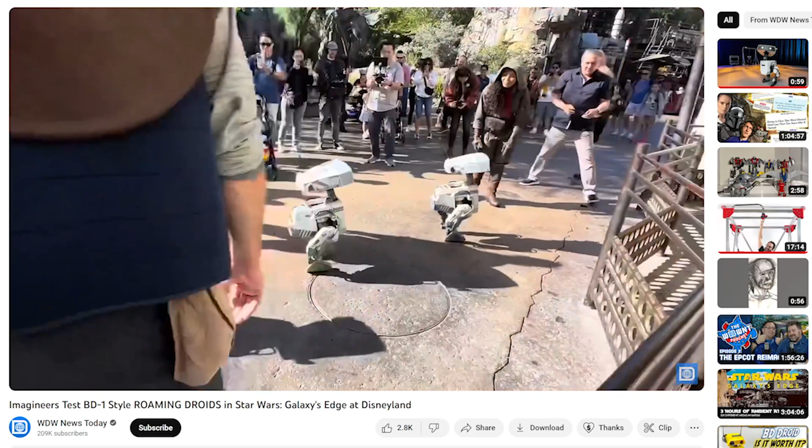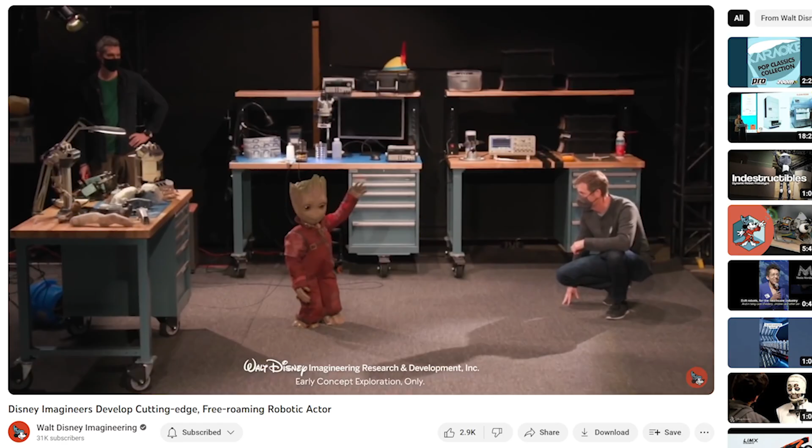A number of people have sent me various videos of the new Star Wars droids walking around Disney's Galaxy's Edge theme park. These are smallish bipedal droid characters, a bit like BD-1, but bigger with bigger joints because they aren't fiction. These are actually pretty dynamic robots which have come out of Disney Imagineering. The same team most likely built the Baby Groot robot we saw a couple of years ago.

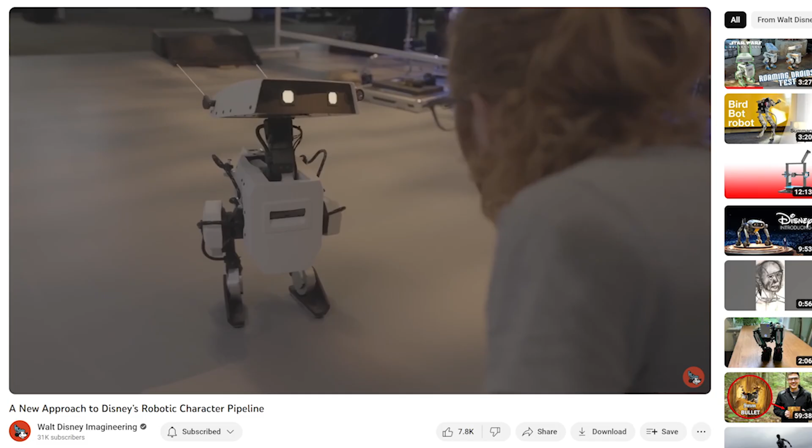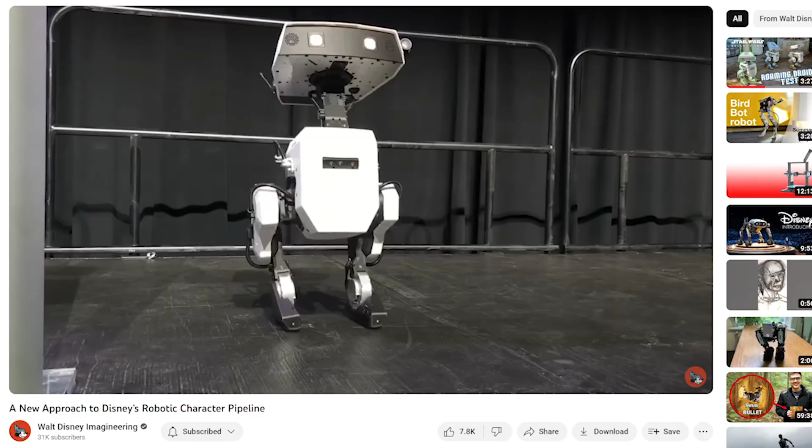Key features include the ability to walk on uneven terrain and stay upright if they get pushed around. They're also quite emotive characters and appear to potentially have some form of AI to make them interact, although they're also puppeteered. Interestingly, it looks like they don't have sideways ankle joints, they just pivot on the feet, which are long edges that touch the ground. Otherwise, as far as I can tell, they have an axis at the ankle, knee and hip, and then two more axes for sidestepping and rotating the legs so they can walk in a curve.

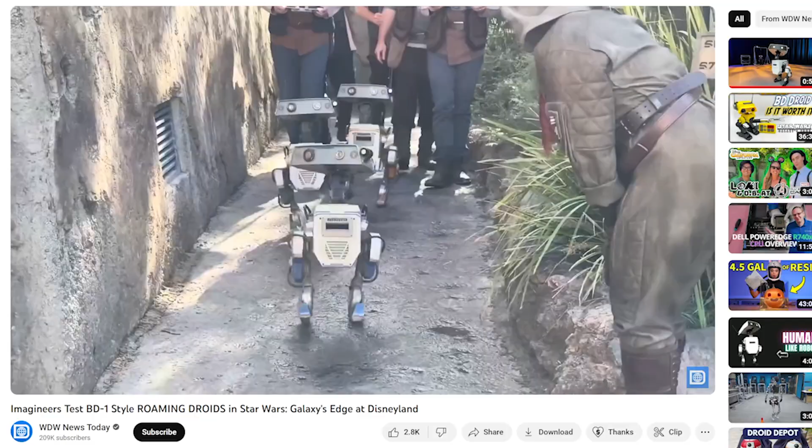They also have a head which does a few things, and in some footage it looks like that may be helping stability front to back. But it's not always apparent, and probably isn't necessary since other bipedal robots don't need to throw mass back and forth like that.

So a lot of people have asked if I can make a project like that, but I'm not a team of researchers funded by Disney. I'm just one person in my house making YouTube videos for clicks.

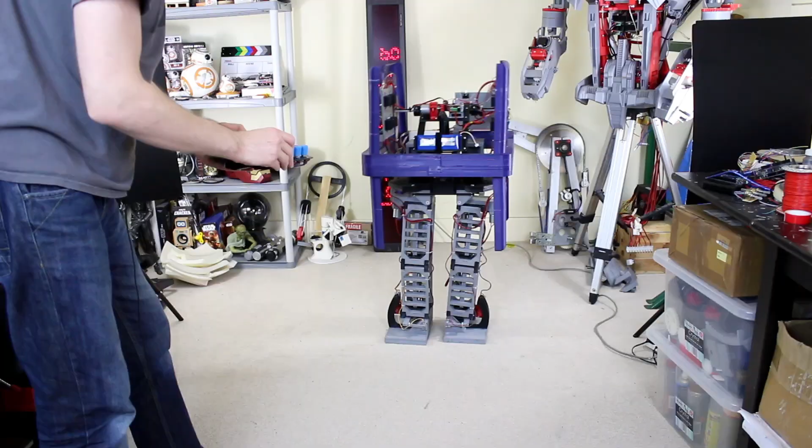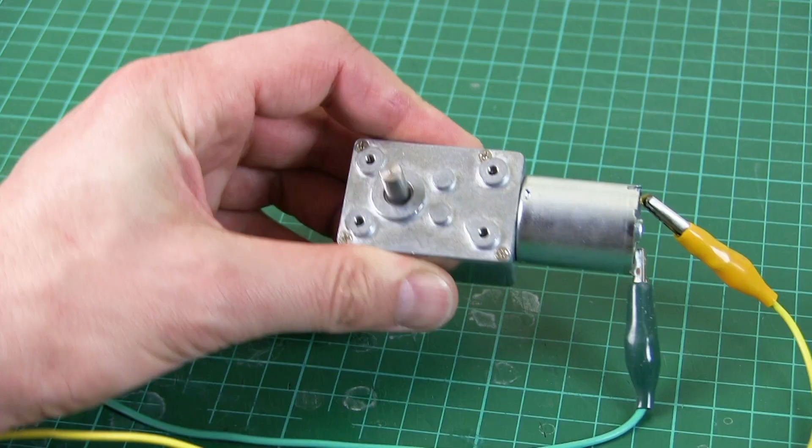Some of you may remember my walking Star Wars Gonk droid that I built some time ago. I was pretty happy with the results at the time. This robot had pretty big feet, which it definitely needed, and I was on a pretty tight budget at the time, so I used motors that only cost around £10 each, and of course a lot of 3D printing. It was dynamically stable though, so it measured its angle with an inertial measurement unit and tried to balance.

However, unlike the robot dogs I went on to build, the Gonk droid had no inverse kinematics or interpolation, which we'll talk about later in this video. So I was just adding some numbers to some of the angles based on how far it leant over and trying to coax it along.

I've learnt a lot since then, and I also have more budget, so I'm going to attempt a new bipedal robot based on the Disney droids.

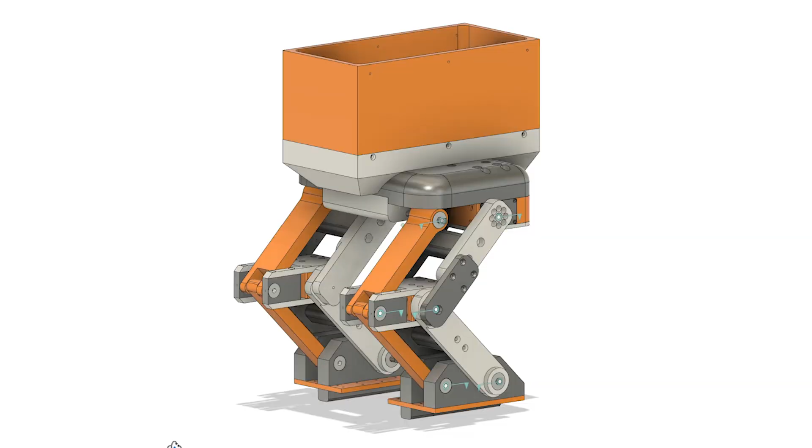The robot I'm going to build in this video will only have 4 motors. I'm going to ignore 4 of the hip joints as well, and also simplify the legs so we just end up with something that's a bit like tipping a box onto its corners without the body being able to translate directly sideways. I am however going to walk on feet with edges to pivot sideways, so no big feet this time around. If this works okay, then I can move on to build something more advanced in a future video with a head and some of the missing joints.

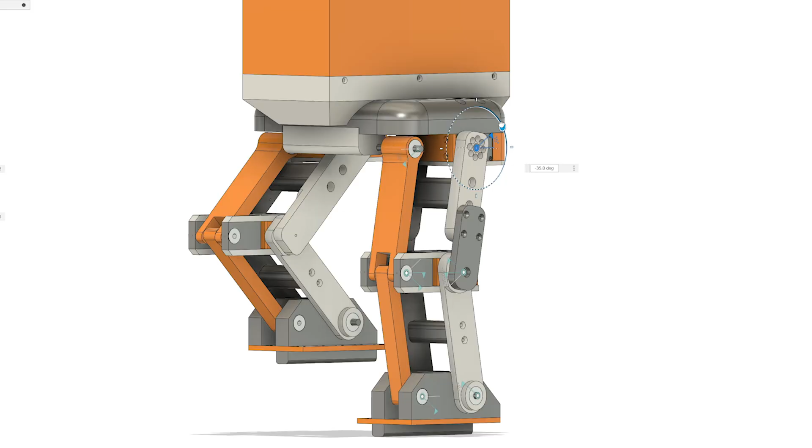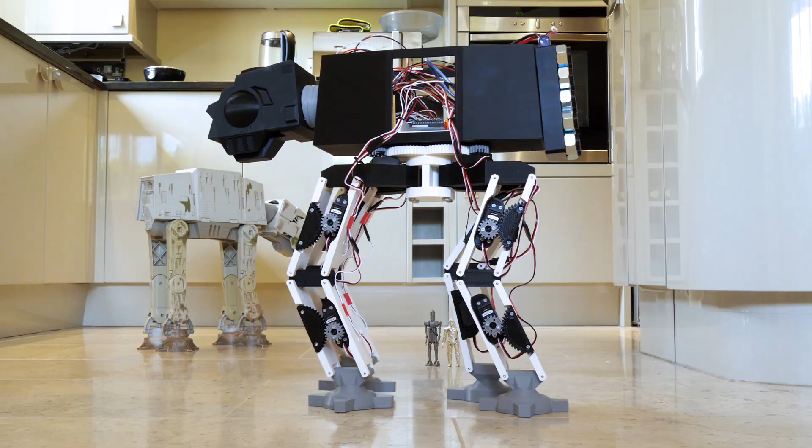So my legs are parallelograms, which means I only need one motor for each half instead of separate ankle, knee and hip motors, and that's all the axes it has. This leg structure is similar to how I recently built the walking AT-AT project, which you can check out on my channel, although that didn't have to balance sideways, and also the original Gonk droid, but that had really big feet. So we'll see how it goes for me this time.

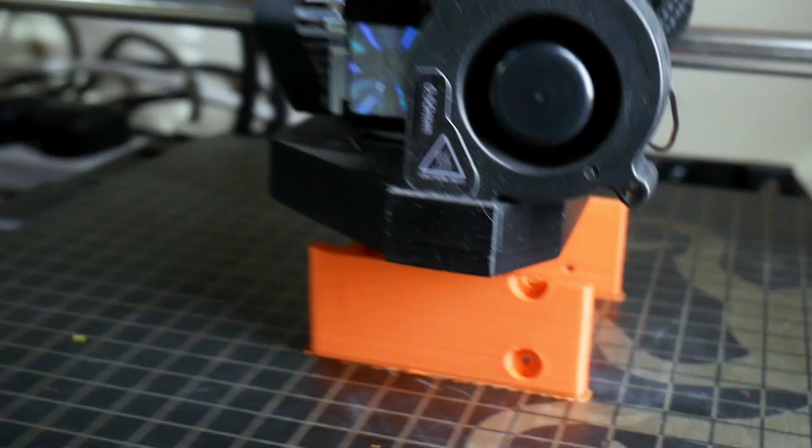There's quite a few parts to make for this project because it's bipedal, which means we have 2 legs and we have to make all the parts twice plus the bit of the body, but it's not as bad as making robot dogs I guess with 4 legs.

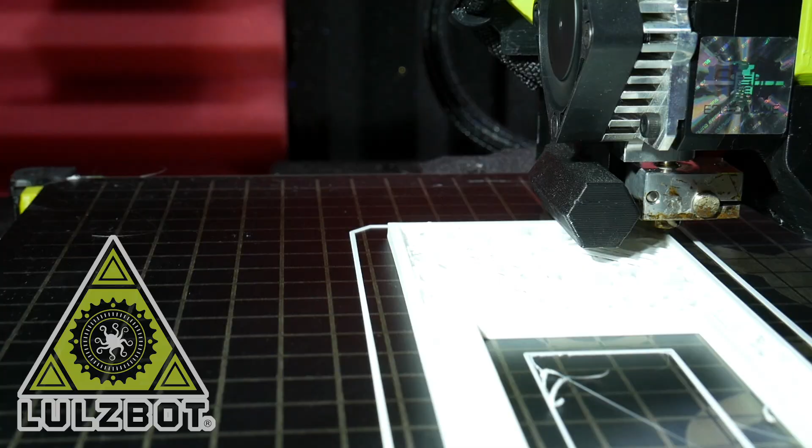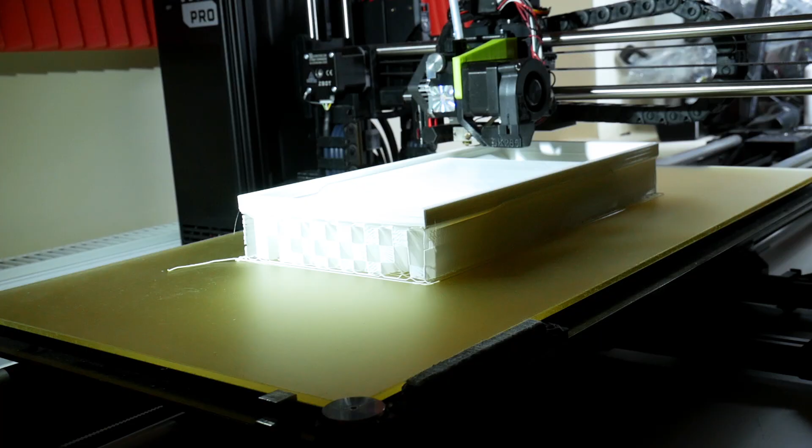Here are some of the sticks that make up the parallelograms for the leg, and we've also got these feet parts to print, of which we've got 4 because there's 2 on each side. The body doesn't actually fit on the normal LulzBot Taz bed, so I'm using the Taz Long bed, which has a bed twice as long as the other printers, and that'll enable me to do the hips and the main piece of the body, which we're colour coding to look just like the Disney droids.

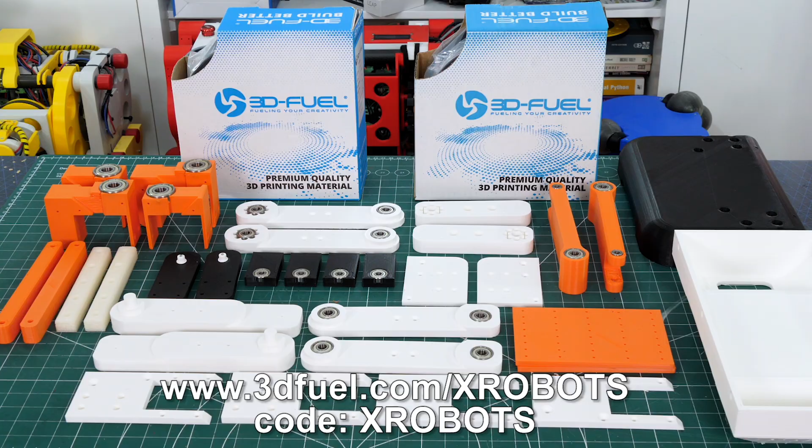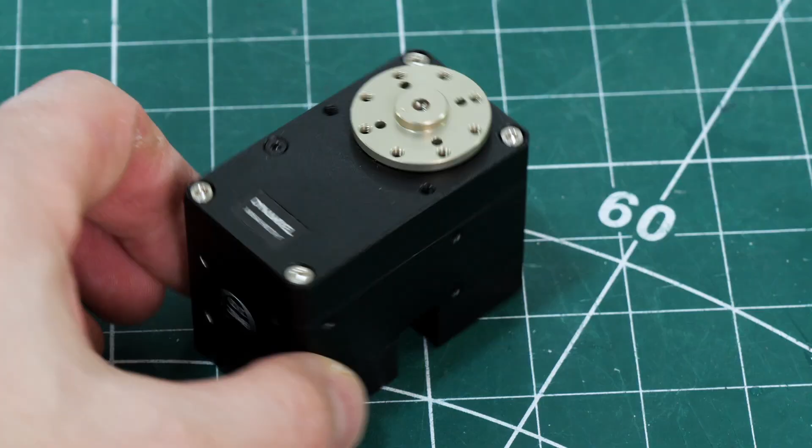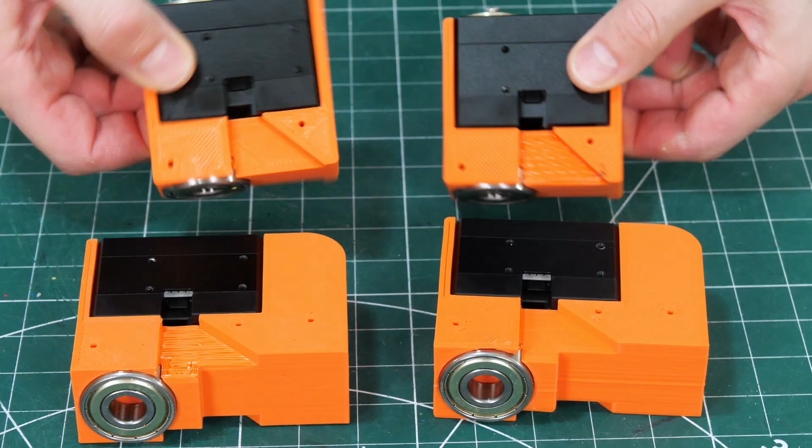I'm going to be using these Dynamixel servos for this project, and these were previously sent to me by Robotis, who are the manufacturer, and I've used these in some projects before. These are XM540 W270T servos. Each one of those is mounted in a housing with a bearing on the bottom, so we can make a double hinged or double braced joint, and that should be pretty sturdy for our robot.

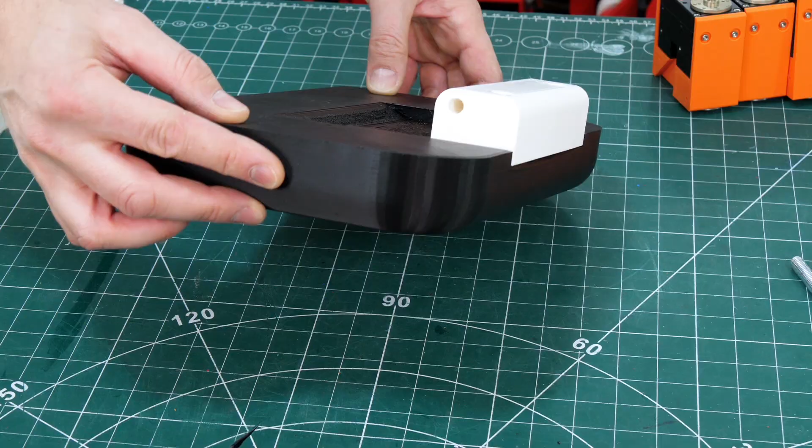This is the hip section for the robot, and on the bottom of that piece I've got another 3D print which is glued and screwed on, and that's going to be the back pivot point for the parallelogram, so I'm just going to put some 8mm studding through there. That's fixed on with some nuts either side, and that's going to make the back pivot point for the legs.

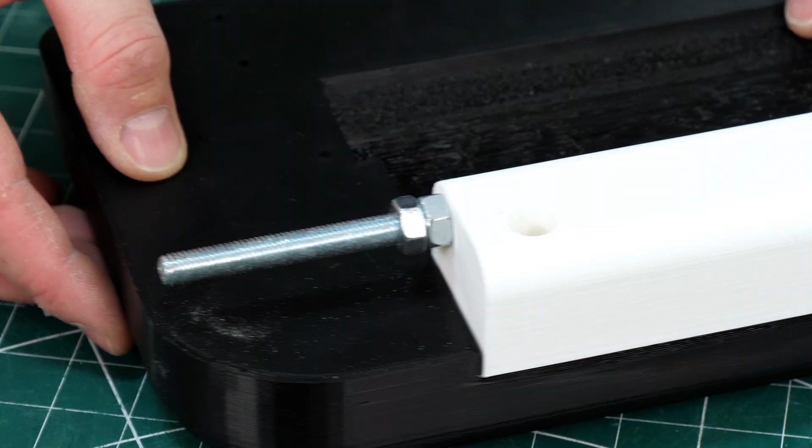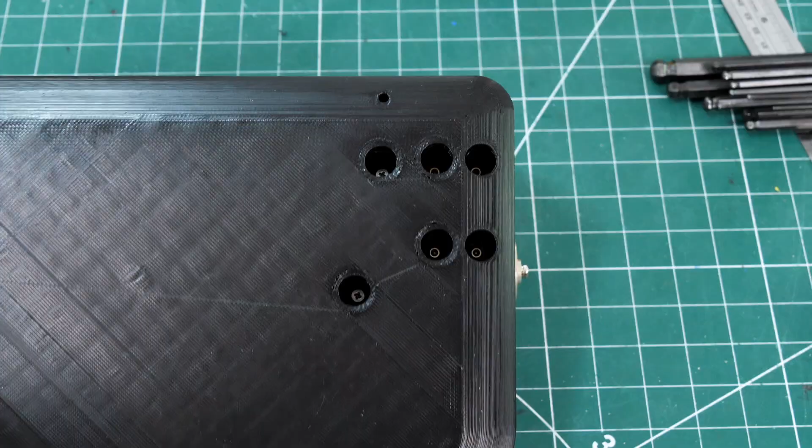So each of these servos actually has some M2 holes, and I've also left some holes in the 3D print, and those can be screwed or bolted through into that hip section. And that's going to be the mounting for most of these servos. I did design a plate for the bottom of these as well, but I'm pretty sure that servo's held on okay now, and it also restricts access to the connector where I need to plug in the data cable, so I'm not going to bother installing those right now.

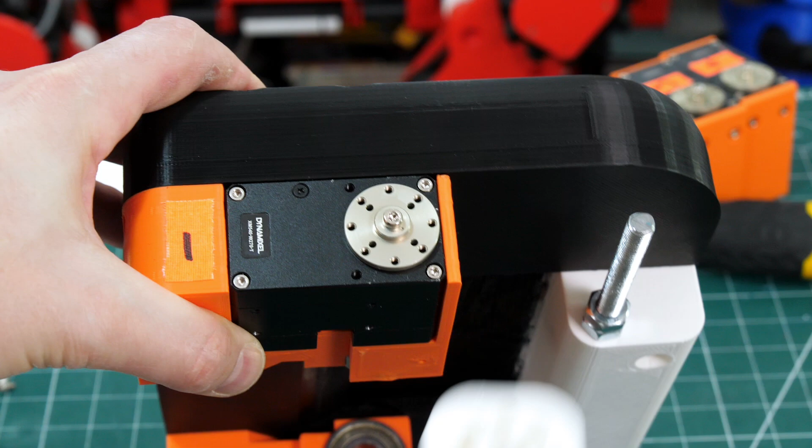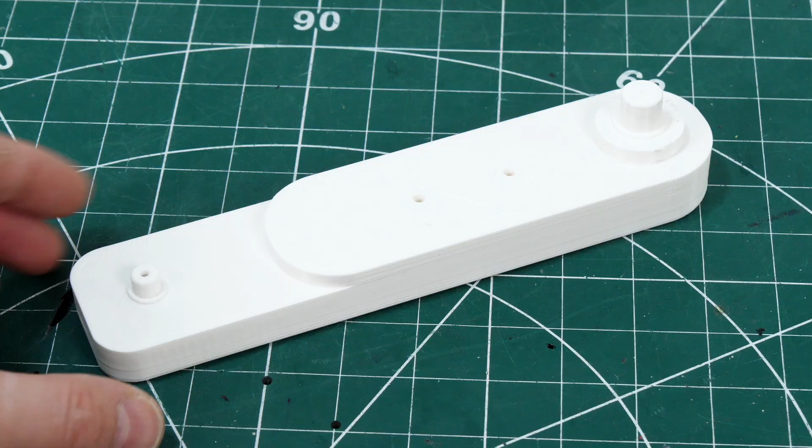The output of the servos has a nice plate with lots of M2 holes, and of course I can attach my 3D print right to it, and that's going to make the first part of the leg on those servos on each side. And that's basically the thighs. On the other side of the servo, the inside of the thighs, we've got another piece, and that piece has got some lumps installed that fit into the bearings. I've put a screw through those, that means they've got a metal core and they won't easily snap off, so that should be super tough.

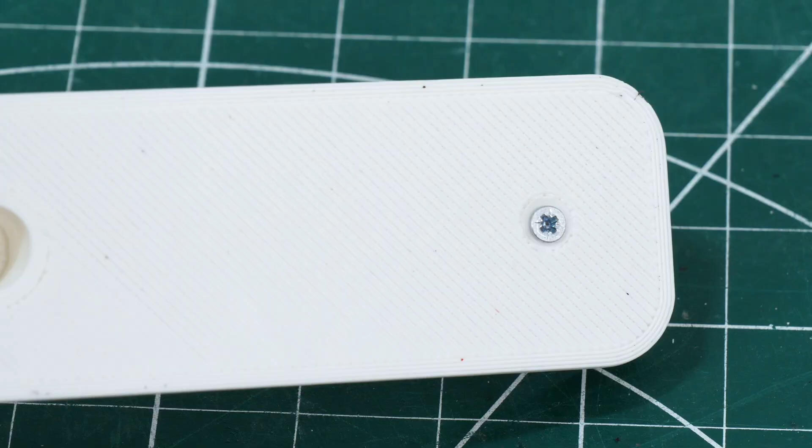That plugs into the bearing, which is on the back of that servo mount, and then that moves quite freely. And there's a spacer between those that holds them together so that the pieces don't just pull out of the bearings. So those are my two fronts of my thighs now complete.

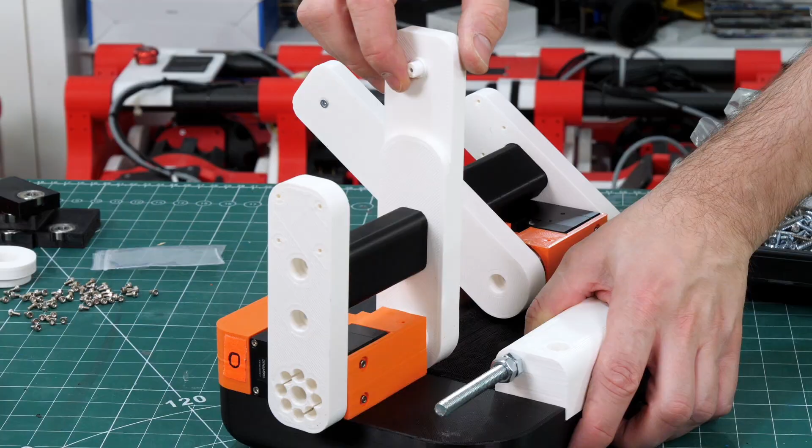The legs are made of parallelograms, so we've got the back of the parallelogram as well, which are made of these parts, which have some bearings installed. So those fit onto the studding on one side, and those are obviously running on bearings, and then on the back they'll fit onto the knee, and that will make the parallelogram for the top half of the leg.

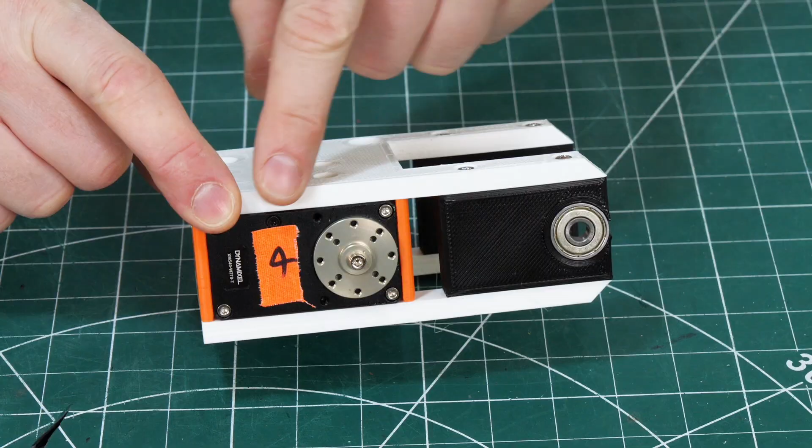The knee sections are two more servos that are going to control the bottom of the leg, so we've got that bearing and the servo horn on the front, and two bearings on the back so we can complete the parallelogram. So the levers are attached to those that go down to the feet, and then on the back of those we've got another piece with a little lump in that fits into those bearings, and that means we've got that double brace section again to go down to the feet.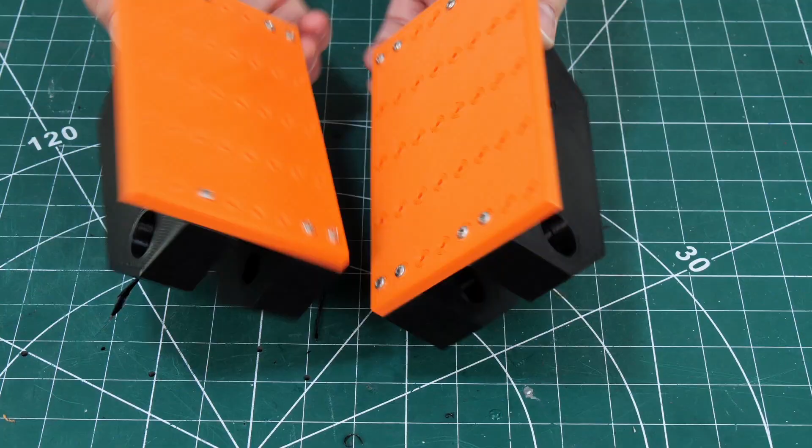The feet have these TPU strips on, which are basically the edges I'm going to walk on, and I'm able to reposition those to different screw holes so we can change the pivot point. And again we've got these orange levers that go down to the back of the ankle to complete the parallelogram, and that's on a bolt through a bearing. With that all together, we've got the bottoms of the legs with the feet attached, and of course each of those are parallelograms with the servo at the knee, which means everything moves parallel together.

You'll notice that orange lever's precariously attached in the middle there with a gap either side, and that means that the orange lever from the top of the leg can come and overlap with it, so they're all pivots on the same pivot points. And you'll also notice there's a bearing on the outside here, and there's also space for a bearing on the inside, and that's again so the top levers can overlap on the same pivot points.

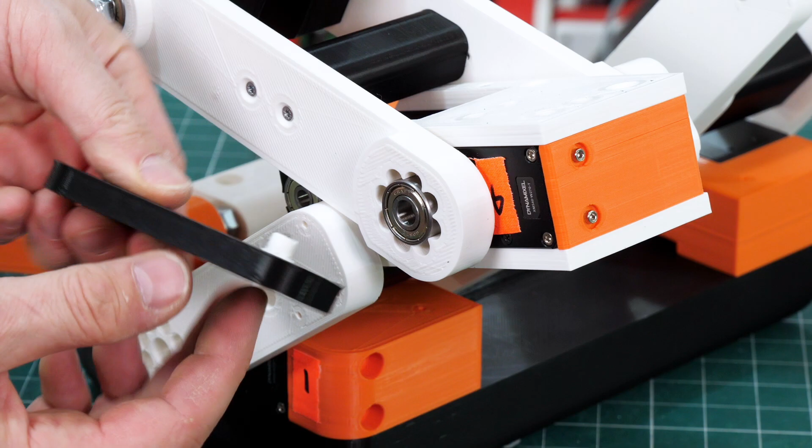And I left those lumps in there on the top of the leg, so we can now put the bottoms of the leg on. And everything's upside down here with the hips onto the bench. The missing piece is on the outside of the thigh, which is another piece with a lump on, and that fits into that bearing on the knee, and then that screws on and holds everything together. So now we've got basically our complete parallelogram as soon as we put that orange lever on, and that, as I said, just fits either side of the bottom half of the lever, and that bolt goes through.

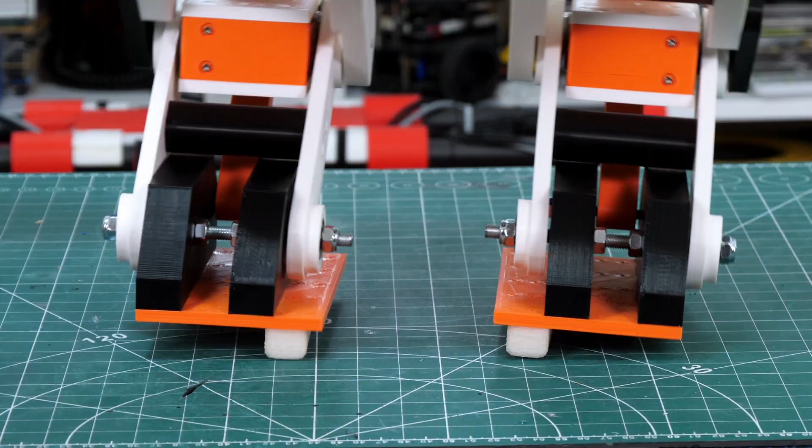So now we've got two parallelograms with all of the pivot points overlapping, and that's going to make it much easier to solve inverse kinematics. These are my lumps that I put on the bottom made of TPU for the pivot points, and I'm probably going to move those around. I've put them quite close together at the moment.

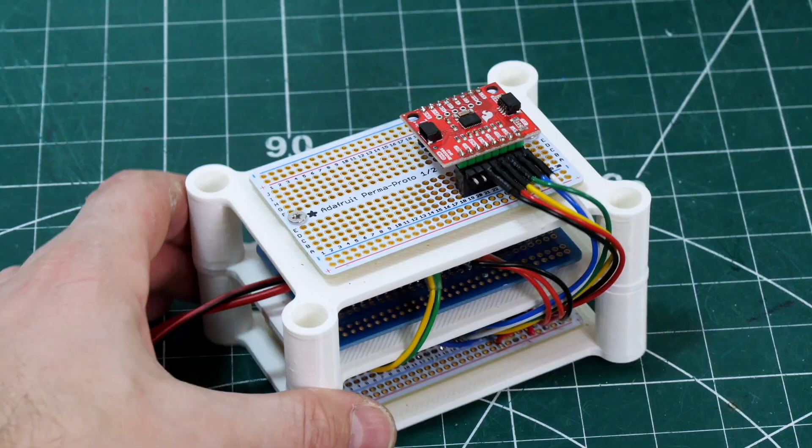This is the body we printed on the TAS long bed, which fits on there, and that's got a split in it so I can take the top off and we can look at the electronics. And that consists of various boards in a stack, which you can see just there. On the bottom of the stack is a Teensy 4.1, which is the main microcontroller, followed by the Dynamixel interface shield, which I've connected to a serial port on the Teensy.

And also on the top we've got the BNO 086, which is a new SparkFun inertial measurement unit that should just give us the angle. I'm using the library and the example provided by SparkFun on the I2C interface to the Teensy, and we can see we've got our three axes of angle there for pitch, roll and yaw. But for these experiments we're only going to use the roll axis. I've got a 3S LiPo battery which is going to power everything sat under the electronics.

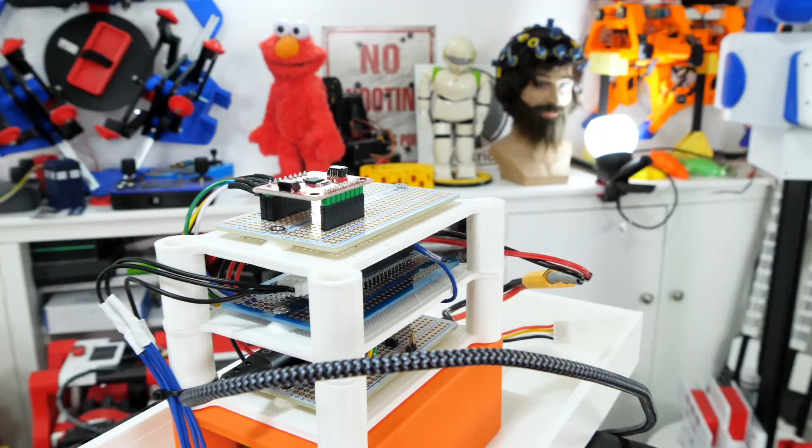So now I've wired in the Dynamixel interface, and I've just split it off and daisy chained the servos in the hips followed by the knees. And that's all you need to do to control them.

Right, let's get this powered up. Well, it's standing under its own power. I've moved these TPU foot blocks slightly further apart so it's a bit more stable now. So kind of like, you know, feels like it wants to walk along really, so let's code it up and see if we can do something.

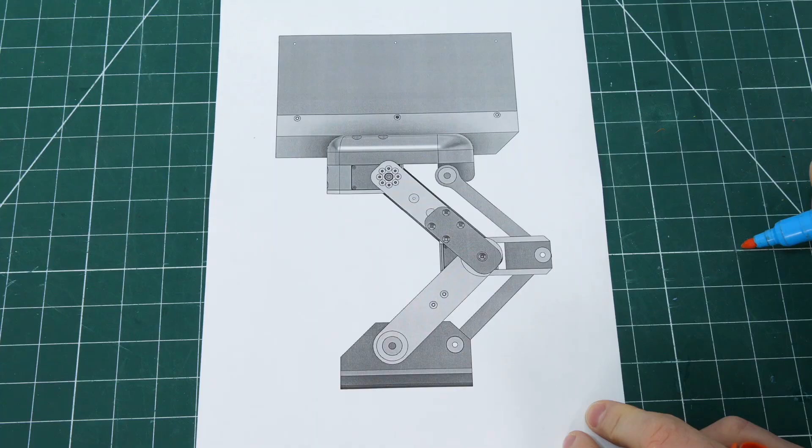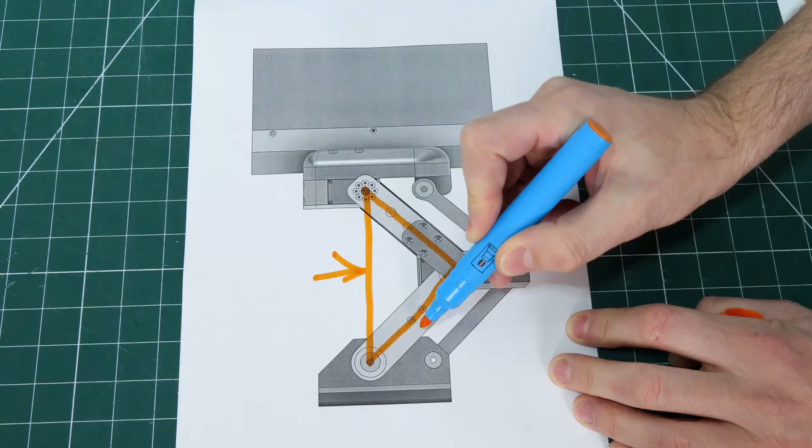I've talked quite a bit about inverse kinematics in some other videos. What we need to achieve is being able to specify the foot position in Cartesian coordinates, which are straight lines like the axes of a graph, and then have the maths work out what the actual joint angle should be for us. This isn't too hard with high school trigonometry if we divide the robot up into triangles. Firstly, we take the side profile of the leg, we know two of the lengths and we need to specify the other one, which means we know all three sides of the triangle. We can use the cosine rule and trigonometry to work out the angles here.

Then once we know which angles are required to make the leg the length we need, we can treat that as a straight line and draw another triangle to move the foot back and forth. That's a right angle triangle, so it's also easy to solve. The hypotenuse of that triangle gets fed into the previous bit of maths to specify the new leg length.

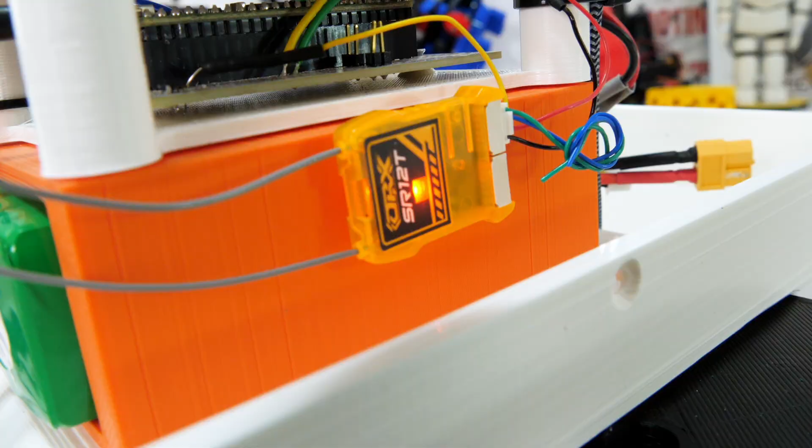I've attached a radio receiver to my electronic stack, which is an Orange receiver for DSM remotes, and I built my own DSM remote in another video that you can check out, which I'll be using in this project. So now if I turn one of the sticks, we can move in the Z-axis up and down, and it should go in a perfectly straight line. We can also move backwards and forwards if I'm really careful not to tip over backwards as we move the mass.

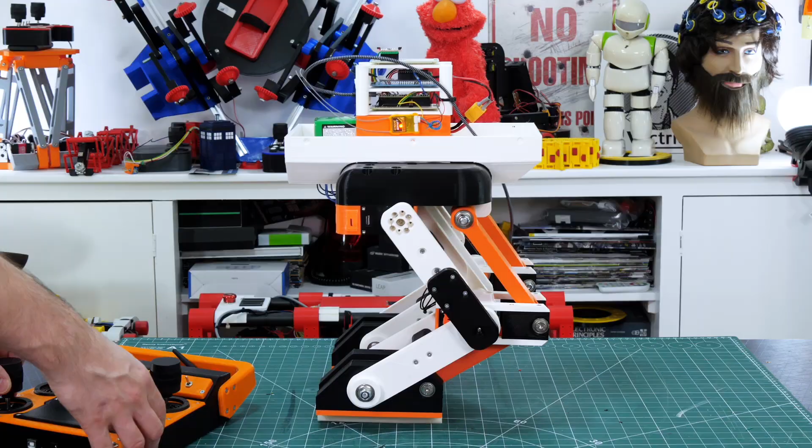Essentially you can see the body moving in a straight line, back and forth, and all of those controls mixed together because one piece of maths is fed into the other. And that means I can move anywhere within the axes of my graph, even if I don't want to move in a straight line. For instance, I can plot a curve or I can move diagonally, and all of those axes work together, just specifying the two coordinates.

It's all very well and good while I'm moving the stick slowly, but if I make a step sequencer, basically I move those legs on timers, then the servos are going to move as fast as they can possibly go between the two positions. And that's far too severe. Probably kicking the leg like this is going to tip the robot over.

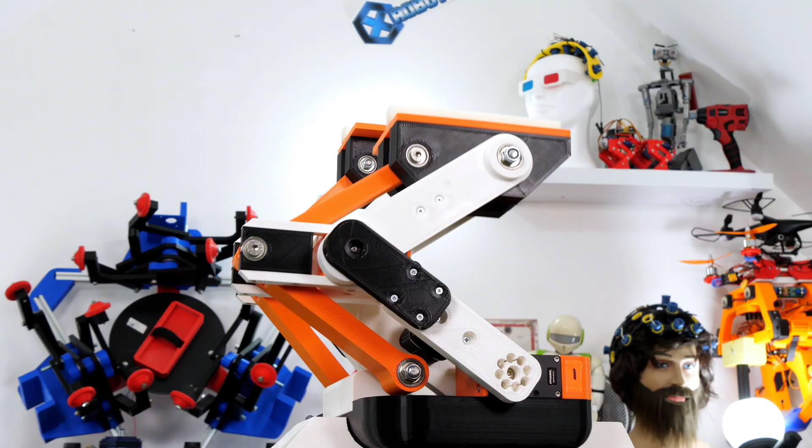So the next thing we need to do is use interpolation, which allows me to plot all the points from A to B over a longer period of time, but with the step change input. I'm using the Arduino ramp library for this, and I've used this several times before. So now I can make those legs move much more slowly over a longer period of time, and basically it interpolates all the positions on the way as if I'm moving the sticks really slowly instead of making that harsh

step change. I can also specify any coordinate for the start and end, and that means I can move the legs diagonally or plot any sort of path that I want to do. We can also of course make both legs move and make them move independently to do whatever motions we'd like. Let's put it on its feet and see what happens.

Obviously with those legs moving to fixed positions on fixed timers, it just pushes itself back and forth. But let's try and push it onto one foot and see if we can get it to take steps. So you can see it kind of looks like it wants to work there, but obviously it's got no sense of balance. We might get 2 or 3 steps out of it, but then of course it overbalances and yeah, a bit of a disaster so far.

If I take that orange body piece off, that removes some of the mass, so now it can thrash around even quicker, which means it probably doesn't work at all. So I can kind of try and hold it in position, but really what we need is for it to work out when it's tipping over itself and stop it tipping over and stop it building up momentum like this and just tipping over. So it looks like those motors are fast enough and powerful enough for it to be able to walk, which is quite good.

But obviously unregulated with fixed timers on fixed positions, we might get 2 or 3 steps in, but then basically inertia builds up as it rocks backwards and forwards, and eventually of course it tips over. So now what we need to do is use that inertial measurement unit that we installed, which is right on top there, to measure the angle and somehow modify those steps to regulate them to try and get it balanced consistently without overbalancing and tipping over.

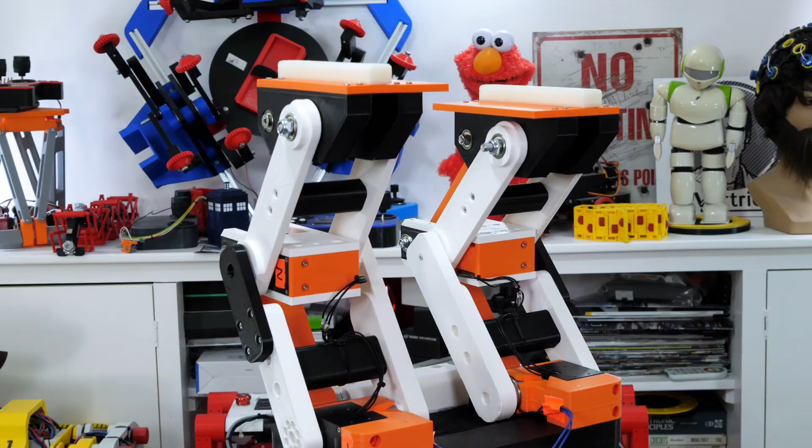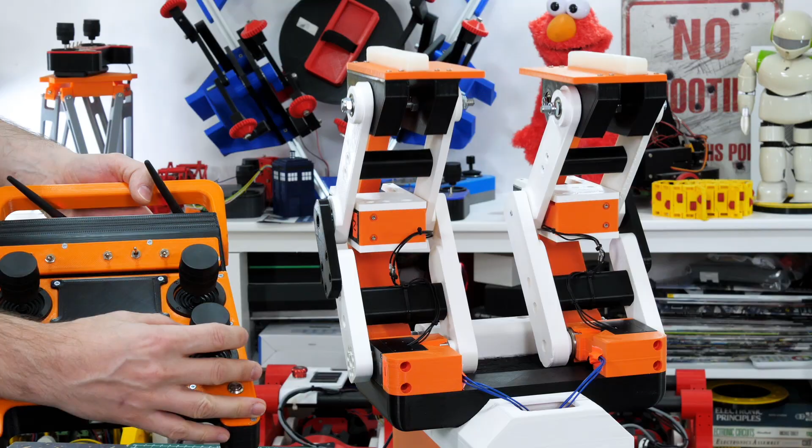So here's what we did have, which is just the feet moving up and down. When one moves up, the other one moves down, and that takes half a second, so a 1 second walking cycle basically. So now what I've done is put a gap in between triggering each of those legs to take a step, and I've tied that to one of my sticks.

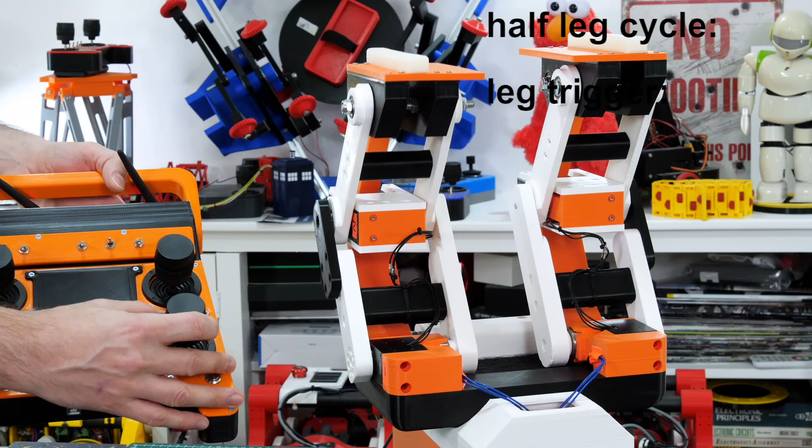So as I turn the stick, the gap in between the steps gets bigger, so you can see that's a really big gap there, and as I turn the stick down again, then that gap gets shorter and shorter until there's no difference and we end up with what we had before. And I plan to regulate this gap with the inertial measurement unit data to keep it stable.

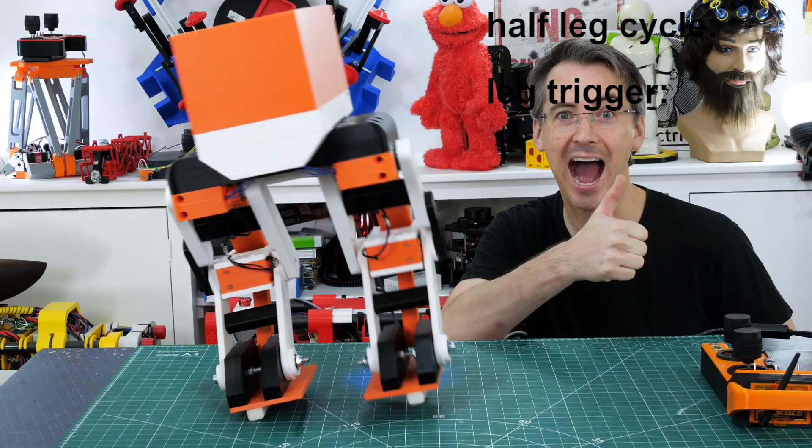So some initial values there, which basically I've got the inertial measurement unit roll axis, which is measuring the angle side to side, and as that angle gets bigger, it makes the gap in between steps bigger. That's all it does. There's no fancy PID controllers or anything, it's just a multiplication.

So if I just hold the programming cable out of the way there so it's not dragging, you can see that if it tips too far, then it kind of slows down and that kills the momentum so it doesn't keep overbalancing. But it doesn't look that consistent and it's still leaning quite a lot, so I think we can still do better than this.

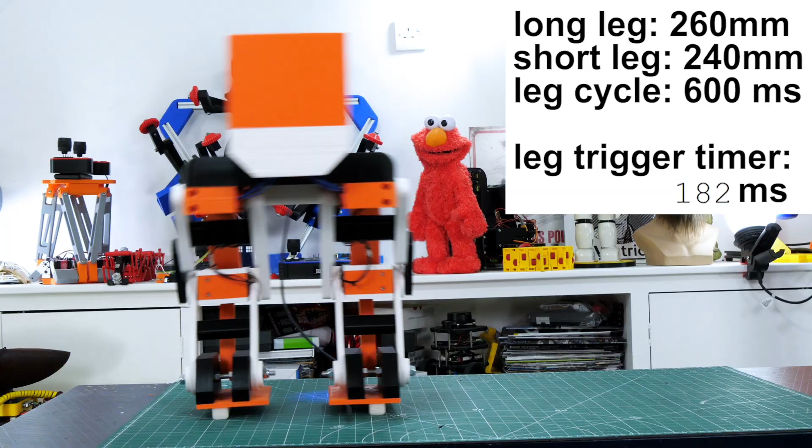This is exactly the same thing, but I'm showing the timer in real time there. The other statistics are that the leg is 260mm at its longest and 240mm at its shortest, so only actually moving 20mm.

The whole leg cycle is 600 milliseconds, so that's 300 milliseconds to lift it up and 300 to put it down. The trigger timer ranges from a minimum of 100 milliseconds up to whatever it is, and I think I just multiplied the IMU roll data by something like 10 and added it on, and that's all it's doing to vary the gap between steps.

You can see that it's quite inconsistent. Sometimes there's a big gap, and as you'd expect, sometimes there's a small gap. So even though it's stable, it looks a bit crazy still.

I thought I'd speed things up a bit so it doesn't have to lean so far. Now my leg cycle is reduced to 500 milliseconds, so 250 milliseconds up and 250 milliseconds to move the leg down, and my trigger time ranges from 50 milliseconds up to whatever, based on adding that IMU data multiplied up until it works by trial and error.

It's still quite inconsistent looking though, because that timer is ranging by quite a large amount. So the answer to that is to have two timers. One shortens the leg cycle, making the up-and-down time shorter when it leans over more, but makes the trigger between the legs longer. So that's basically making the step shorter and the gap between them longer, but altogether that gives us roughly the same amount. That looks much more consistent and much more stable and repeatable.

This is exactly the same thing, but we're just going to have a close-up there. We can see that it's definitely walking on those edges, and it's definitely taking its feet off the ground, which is pretty good, so no shuffling. It's not relying on those big plates to balance, it's definitely walking on those edges.

I'm pretty happy with how this has gone for a 2-week project. I wasn't really sure if I'd be able to make this work at all without any hip joints to translate sideways, just tipping onto the corners like a box tipping onto its corners basically. So I'm pretty happy with how this has worked out so far.

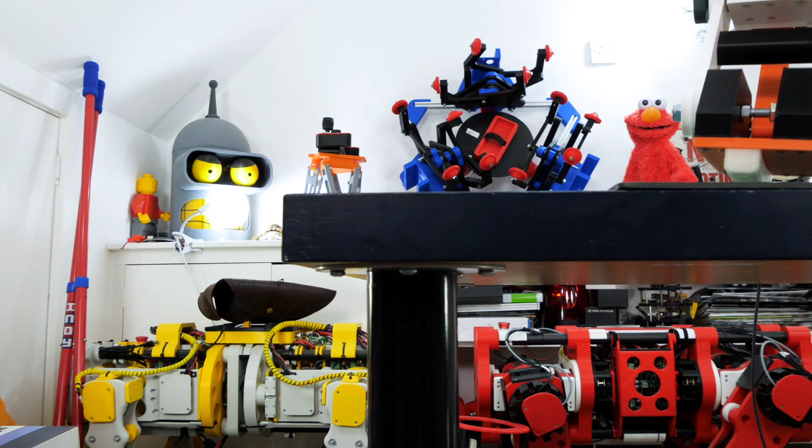The only thing I will point out though is that the table's quite wobbly, and that may be causing me some issues. It's similar to if you put lots of metronomes on a moving table, they all go in sync. So it may be that the robot is also reflecting the coefficient of the wobbliness of the table, but I'm pretty sure this is pretty good for something I threw together.

It does start by itself. When I pick it up, it feels a bit sketchy. I probably need another little sequence to start off the first step differently.

If I push the feet along though, it feels very much like it wants to walk along, and it still balances okay. So I should probably try and code up something here to try and make it take some rudimentary steps, and see if we can get it to locomote.

Stopping isn't graceful either really. So I just added some extra stages to my step sequencer to move the feet back when they're on the ground and move them forward when they're off the ground, and now it basically takes rudimentary steps. If it reminds you of Huey, Dewey and Louie, then post in the comments.

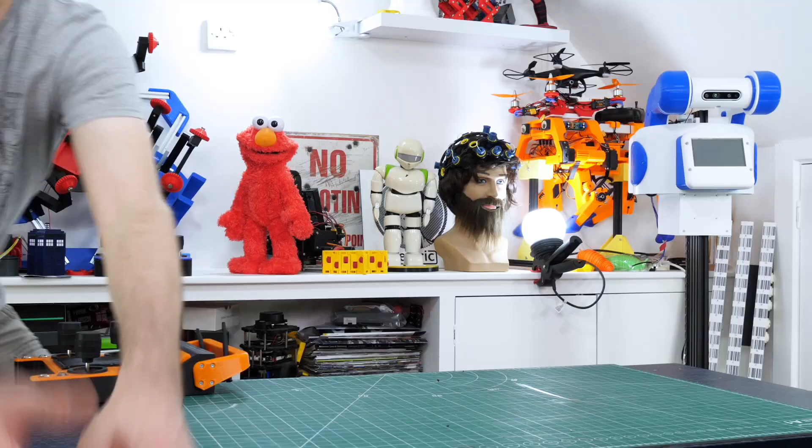This is where I probably should have grabbed the robot instead of trying to stop it with the remote, because disaster struck. Yeah, the plastic's completely smashed there. So that's the end of that.

Well, I need to rebuild the hips anyway to put the joints in so it can go like this, and also so it can go like this, so it can turn on the spot. So that's at least another 2 axes per hip that I need to rebuild, which is going to happen in a future video. I'm pretty happy with that for a 2-week project. It's given me quite a lot of confidence that I can actually make this work. I'm also going to put the head on next time as well.